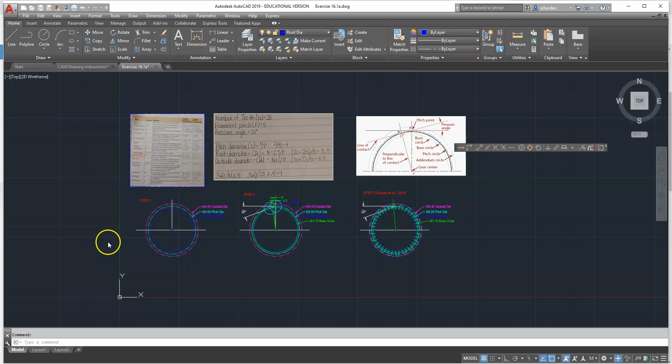This is a video on how to draw your gear teeth, okay? As I said in the PowerPoint, you need your outside diameter, your pitch diameter, and your root diameter. So you need these three circles. Now, the base circle that I spoke of, you need your pressure angle in order to get that.

But first off, based on the information in the lab, the number of teeth is equal to 20, your diametral pitch is equal to 5, and then the pressure angle is 20 degrees. So you want to calculate your pitch diameter, your root diameter, and your outside diameter. Your pitch diameter is your number of teeth divided by your diametral pitch.

Now these calculations come from table 16.2, spur gear terminology, that's in your book. You have one column that is for 20 degree and 25 degree pressure angles. And then you have another column that is 14.5 degrees for your pressure angle. So you want to make sure you're under the right column when using the calculations. And that's dependent upon your pressure angles.

So the pitch diameter is the number of teeth divided by your diametral pitch. In this case, it's 20 teeth divided by 5. It's going to give you 4. So your pitch diameter is going to be 4. Then your root diameter is the number of teeth minus 2.5 divided by your diametral pitch. Okay, that's going to give you 3.5.

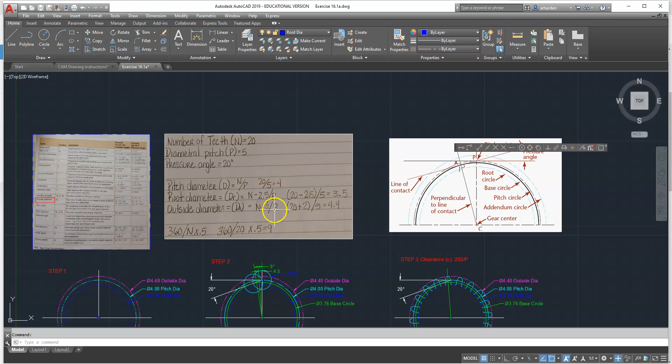And then your outside diameter is the number of teeth plus 2 divided by your diametral pitch. That's going to give you 4.4. So those are the dimensions for those three circles. Okay, so that's how you obtain the dimensions. Now you want to make sure that you're using center diameter when drawing those circles. Okay, you do not use center radius.

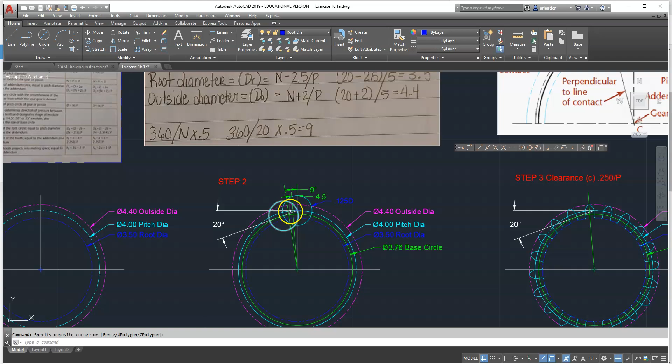Now the next step, once you have those three circles, is to draw your base circle. Okay, so we need our base circle. In order to do that, you're going to draw a horizontal line that starts from your pitch point. Your pitch point is where your vertical line, which is this profile line here, and your pitch diameter circle intersect. So where that intersects is your pitch point.

Now you're going to draw a line, as I said, a horizontal line out from that. And then you're going to draw a line that is 20 degrees down from that horizontal line. This is going to be your pressure angle, okay? So for that pressure angle that you form, this time you've got to use center radius, okay? So you're going to use center radius.

You're going to select the center, and then you want to select tangent, and you want to pull that circle up and make it tangent to this line, which is your pressure angle line. That's going to form your base circle, okay? And if you needed the dimension of that base circle, you would just type in DI and select the center over to the circle, and that will give you the radius. And you know the diameter is twice the radius. So that's how you would find the dimension for your base circle, okay?

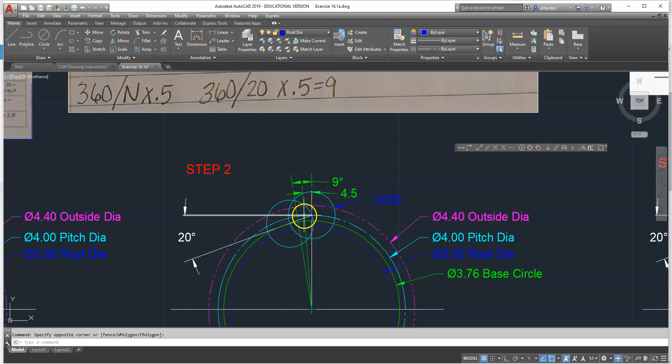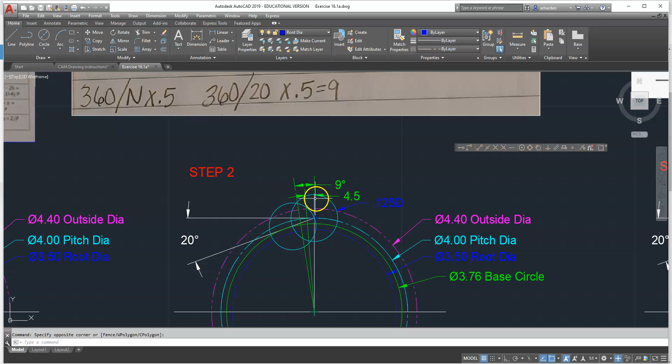So once you do that, then it's a matter of drawing the teeth. Now remember, you had equal spaces for those teeth. So basically you would take the 360 degrees of the circle divided by the number of teeth, and then take half of that, and that's going to give you the tooth thickness, okay? And then half of that is the 4.5. That's the center in between your tooth thickness. So then from there, I have the steps for your gear in a note on Moodle. Everything that I'm doing here is in the steps that I've given in the notes on Moodle.

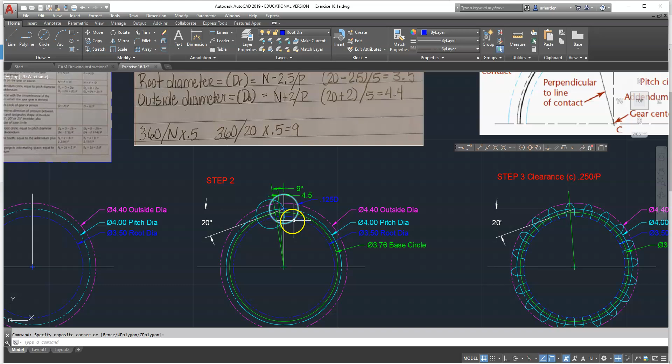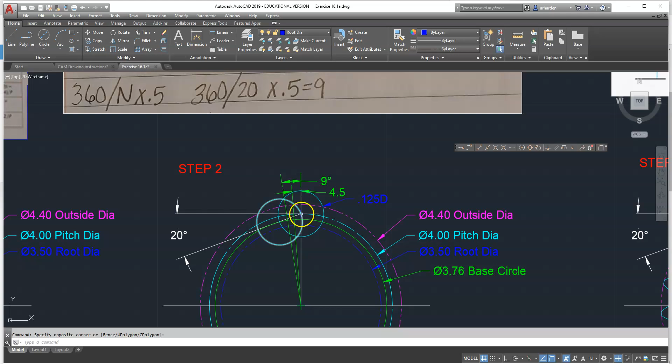So basically you want to draw these two circles right here. These two circles are basically taking .125 times your pitch diameter, which is the 4. Once you get that value, you're going to draw a circle with the center at your pitch point, okay? Once you draw this circle, where this circle and your base circle intersect is where you're going to form the center of your

second circle, which is the same diameter as this one. So they're the same diameter, they're just placed in different positions. This one is placed at your pitch point. Again, that's where this profile line and your pitch diameter circle intersect. And then you're going to place this circle where the center is where the circumference of this circle and your base circle intersect. And that's going to be the center for this circle.

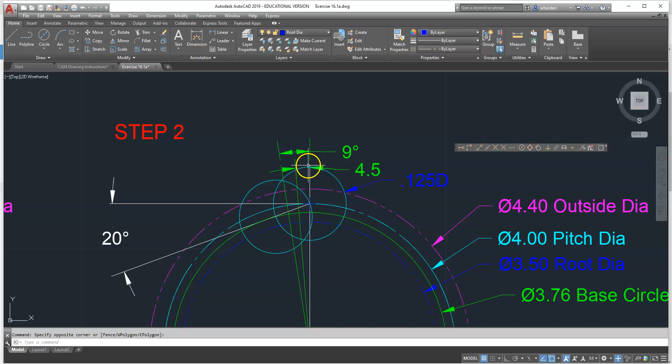So once you do that, you can kind of start to see your teeth form. Basically, I'm going to put this on one tooth. You're going to draw a line from your root up to that pitch point, okay? You also have a line from here up to your pitch point, okay? So those are the two lines for the bottom part of my tooth.

Now this curve that you see here is the tooth forming. So basically you want to trim this. So you're going to select this curve, select this line, which is the bottom part of your tooth, okay? And you want to select your outside diameter. So when I select trim, I'm going to take this portion away because it stops here. I'm going to take this portion away and I'm left with this curve, okay?

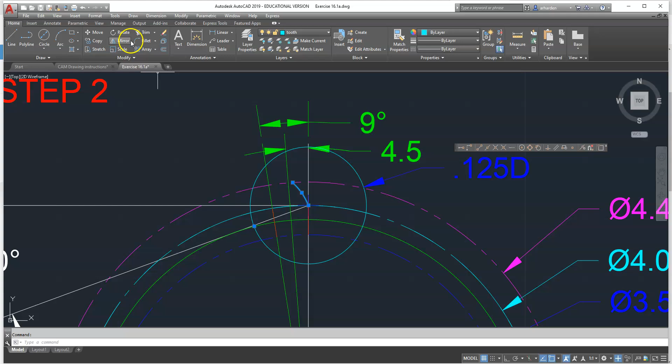So that curve, I can mirror it to the other side. So when I select this curve and select mirror, and then I'm going to select the line that's down the center, and I want to keep the other side, that's going to give me the tooth on the other side. So I'm going to switch this over to the color of the tooth. This text, let me switch all this to the tooth. Okay. So this is my tooth.

Now I got to make sure that this part here is trimmed, which takes on this part of your outside diameter. So really you can select this and the two curves and then trim. And that's going to give you your line down the middle, okay? So that's your tooth forming. So now you have your tooth. So now this tooth, basically you're going to select everything that is associated to your tooth.

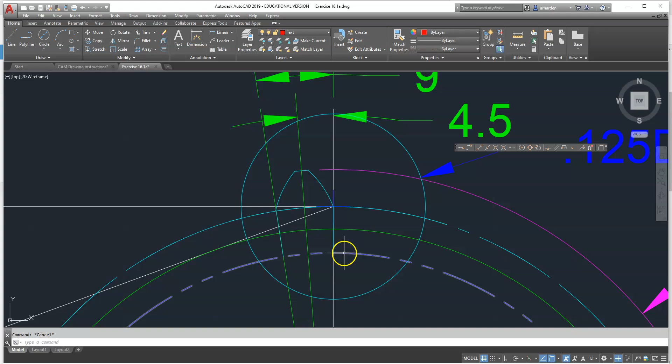Wait, before we actually polar array, let's go ahead and do the fillets. Now remember the fillet is 0.125 times your diameter, right? Okay, so we're going to take 0.125 times 4, which is going to give us 0.5. So basically what we're going to do is select fillet, then select radius. We're going to type in 0.5 and press enter.

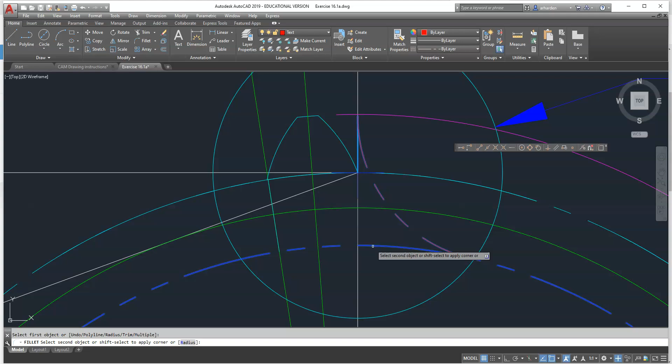We're going to select this side of our tooth, and I think it's 0.05. I'm sorry, I put 0.05. So it's fillet, radius, and 0.05. So it should have been your diametral pitch, and press enter. So you're going to select this side and here, and then you're going to press enter to activate the fillet command again. Press this line and here, and that's going to give you your fillets on both sides.

So then you just trim. So you select your root circle, your two fillets, and then you're going to get rid of this part in the middle, okay? And then you're ready to polar array. So I'm going to go ahead and change this over to the tooth layer. So you're going to select everything that's associated with the tooth.

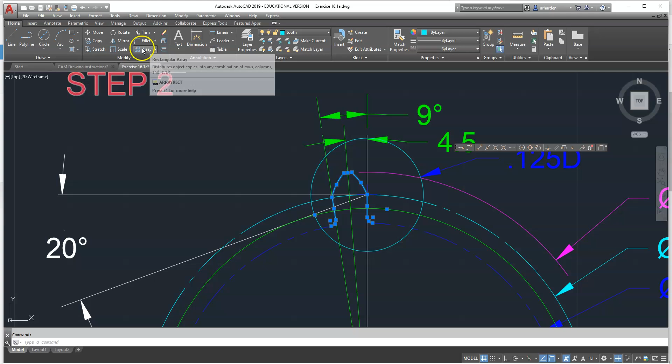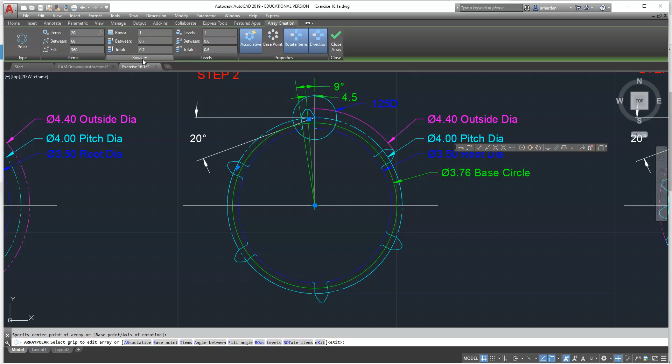And then you're going to select polar array. Right now it's currently on the rectangular array. You're going to select polar array. And then you're going to select the center of the circle. By default it places 6 teeth, but we need 20. So we're going to type in 20. Okay. And that's going to give me my 20 teeth.

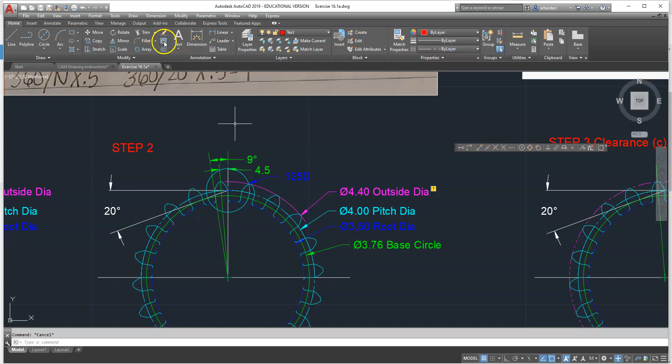So then what I need to do is just put a window around everything. My final gear, just put a window around everything and select trim. But before you do that, you want to make sure that you select explode, which is the little box with all the sides pushed out. Because if you don't do that, you won't be able to trim the gear. So you want to select that and press enter. Now you see that every tooth is an individual tooth.

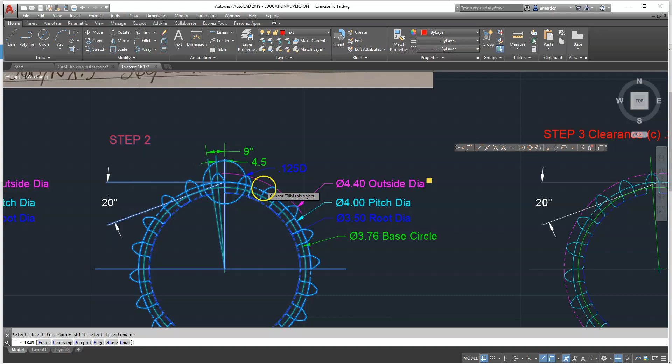So then the easiest way is to just put a window around everything and then right click and then start to get rid of the parts that you do not need, which is on the inside of the tooth. Okay. Once you finish doing all that, you would draw your shaft, the keyway, and everything according to your layout. You will put all that in the middle, and then draw your right side view to the side of that.

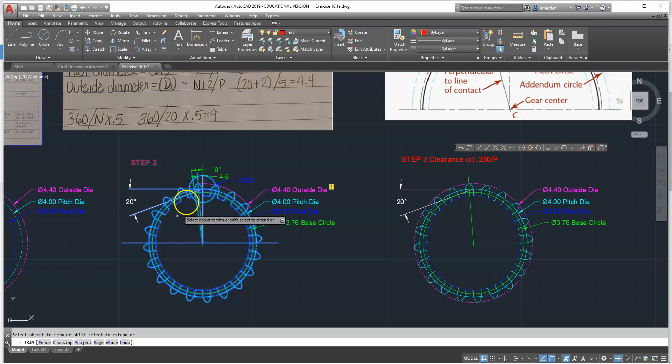So basically, I want to show you guys how to do the actual teeth on the gear, and you should already know how to draw your right side view, and then make sure you dimension your right side with the correct dimension. Remember, you wouldn't have all these dimensions on the gear. You should put that in your side view and make sure you put the diameter symbol in there.

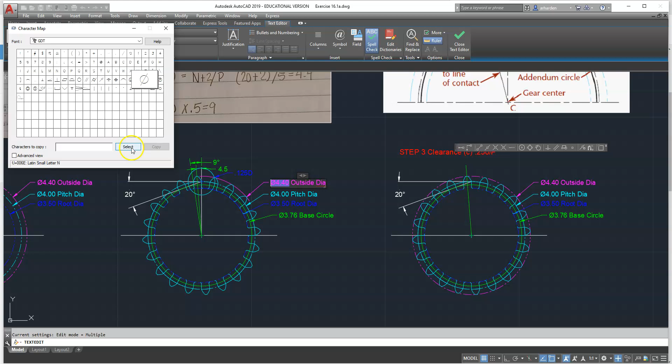So basically, if you click on it, you will have to go to symbols and then go down to other, and that's going to pop this up. Let's see, I think it's under GDT. Yes, it's right here. So you would click this, select, then copy, and then when you come in here, you would just right click and select paste, and that will put the diameter symbol in there.

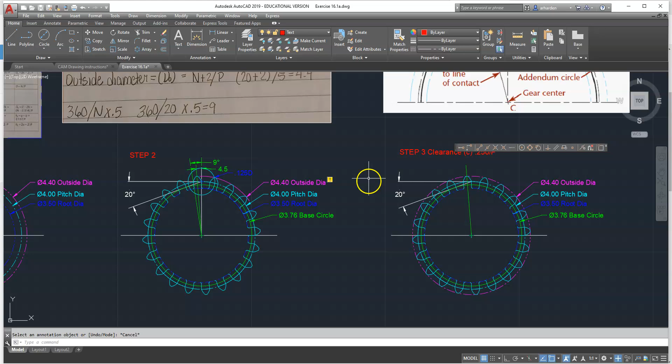Okay, so of course when you do this it automatically places that diameter symbol, but when you draw the side view and place that in there, you have to put that symbol in there yourself. Okay, so that's pretty much how you would draw gears. And the next video that I create is going to be on cams, but this one is for gears.